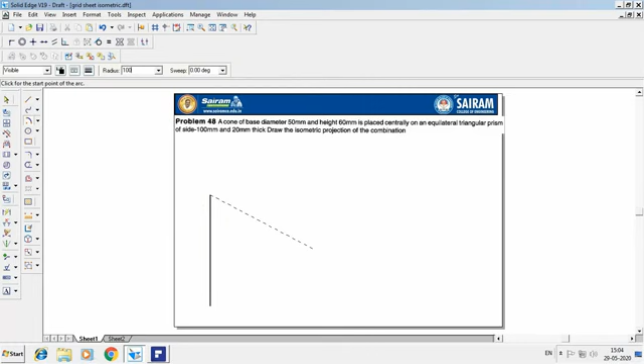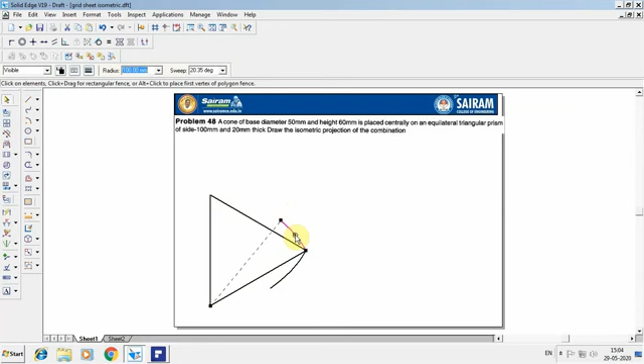Let us draw the equilateral triangle first, taking the base as 100 mm. Then I'll take the arc by center point at radius 100, draw the arc, and similarly take the radius again as 100 and cut. So I trim off this and get the end points so that I get an equilateral triangle of 100 mm each side. Once this is done, you have to convert it into a rectangle.

So I want to take the position over here, extend this and convert that into a rectangle and take the dimensions. One side will be 100 as the base, and this side you want to get as 86.6, which you keep as it is.

Now I'm going to label the points: this as 1, 2, 3, and this as 4. So I'm going to start with 1 now.

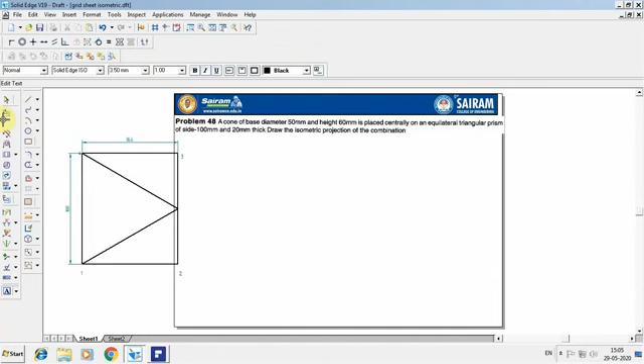So 1 to 2 will be 86.6 at an angle of 30. Then I have to take 100 at an angle of 150. Then again it will be 86.6 at an angle of minus 150. Then 100 at an angle of minus 30.

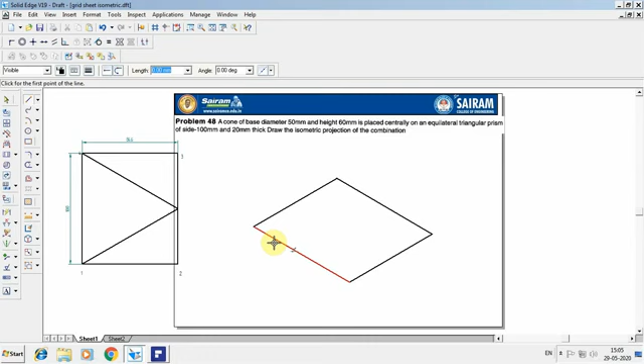Once you've done this, 1 to 4 will be the exact one, and here you have to join exactly to the center. So I will go for the center of that one, and this will be the isometric view of a triangle.

So this I want to take as 0.13 thickness. Identify the center point - you can identify it from here, or you can go for the iso sketch also.

So I can go for the trim, trim off that, and take the dimension of this. This will be the center point, 28.87. Or you can keep the line as it is - trim this one and keep this as it is.

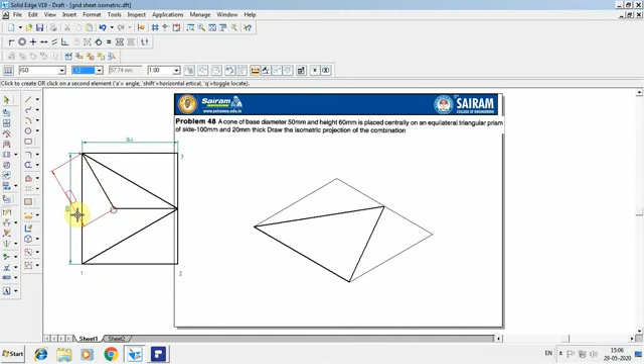So I want to take the distance from here to this as 28.87, and draw a line from the center to this one. On this line I'm going to take 28.87 and keep it on the line - that will be the center line.

Now the height of the triangular prism is given as 20, so I'm going to take the axis height as 20. These lines you can trim off, and keep this as 0.13 as a reference line - this is the axis, so convert that into an axis.

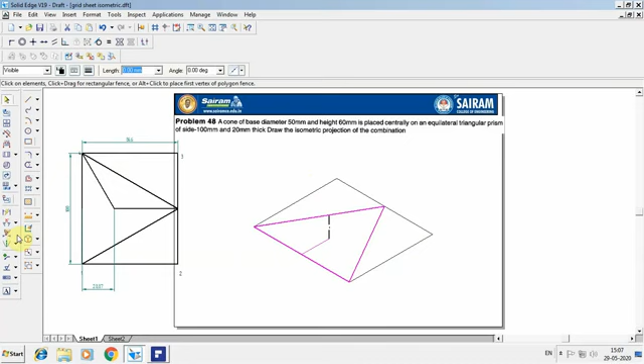Now I want to select everything, leaving the axis, and go for the move option with a copy. I'm going to select this point to be on this point, then join the lines of all three corners. So this is how the prism will look in isometric view.

So this is the center point. Now on this center point I have to construct a cone. Again, the cone can be constructed directly on this, or I can separately construct it and place it on that - so both methods are going to be shown now.

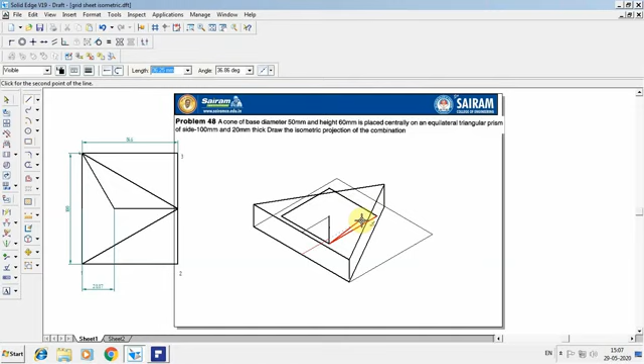So the cone is of 50 mm, so I want to come down as 25. I'm going to take 25 mm at an angle of minus 90, then 58 at an angle of 30, 58 at an angle of 150, 58 at an angle of minus 150, 58 at an angle of minus 30. Once you've got this, I have to construct the circle over there.

I'll make these lines as thin construction lines. Take the line from this point to the opposite center point, similarly from here to the opposite center point, so that you can easily identify the visible things.

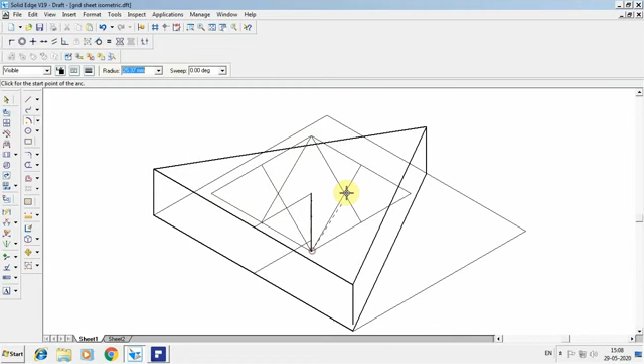Again from here to the center point of this, similarly from here to the center point of this. Go by arc by center point: select this as the center, this as the radius, and I want to join. This as the center, this as the radius, I want to join. At the intersection point, take the radius, and again at the intersection point take the center, and I want to draw the radius.

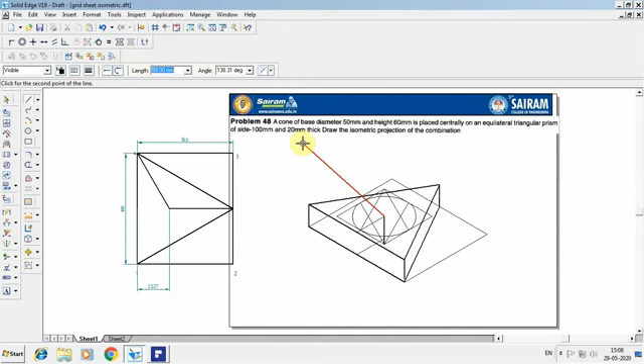So once you've done this, from the center, the height of the cone is given as 60. Select 60 mm height and keep that as the axis line. So now zoom that.

Which lines are visible, I want to take as thick lines, and the axis also I want to take as thick. So later I can trim off the lines.

I'll go from this to the tangent line, and similarly from here to the tangent line. Select these two and make that as 0.5 mm.

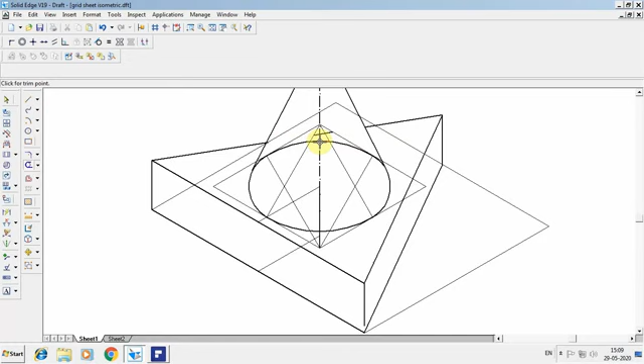Now if you want to trim off the invisible lines, go for the trim option and trim off whatever is inside. This and this also you can remove.

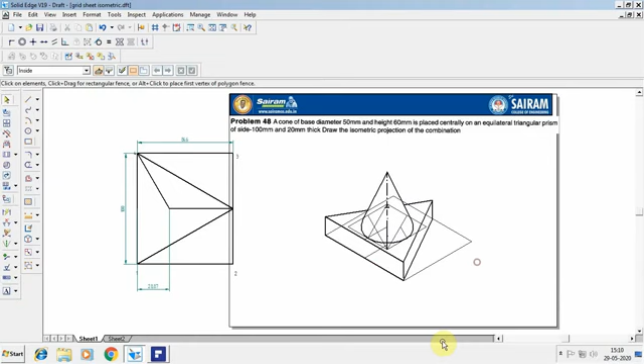So this is how it's going to look in the isometric view. To make that an isometric projection, select this, go for scale, and convert that into 0.8. So this is how you complete the problem on a triangle and a cone.

Let us consider another problem. A triangular pyramid, base side 40 mm and height 50 mm, is placed centrally on a square slab of side 80 mm and 20 mm thick. Draw the isometric projection of the combination.

So here also we have a triangular pyramid and a square slab. Let us take the square slab first. The square slab thickness is given as 20 and length is given as 80.

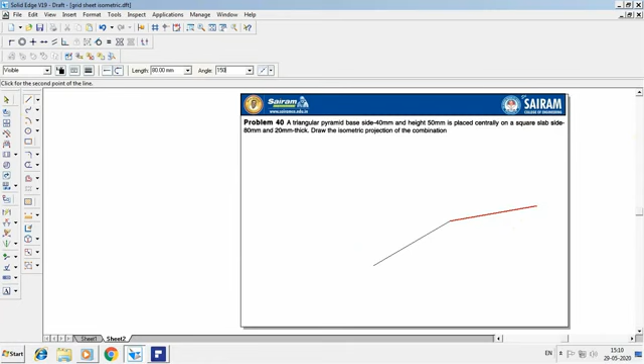So 80 at 30 degrees, 80 at 150 degrees, 80 at minus 150 degrees, 80 at minus 30 degrees. The height is given as 20, so I can take 20 mm thick.

Again you can go for 80 at an angle of 150, 80 at an angle of minus 150, 80 at an angle of minus 30, and 80 at an angle of plus 30.

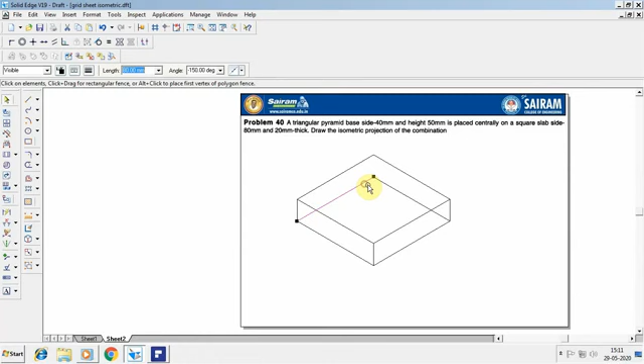Once you're done, join that. Go for this and trim off whatever is invisible. Later I can take the center line.

So this indicates the center line, this is the center point or axis point of the square slab. Now above it I have to place a triangular pyramid.

To construct a triangular pyramid, first normally I have to go for the normal sketch. The base side is given as 40, so better you can take 40 at an angle of minus 90.

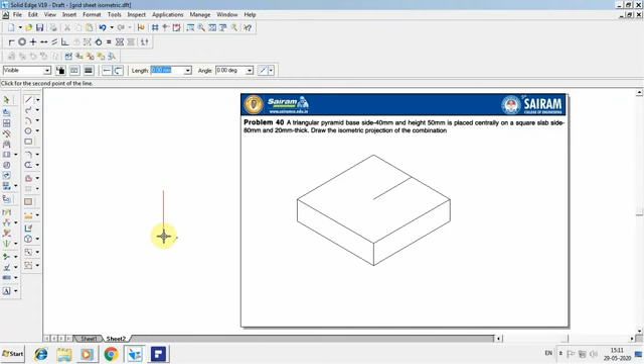Then go for arc by center point, 40 as the radius, draw. Similarly from here, radius as 40, draw the arc. Go for trim.

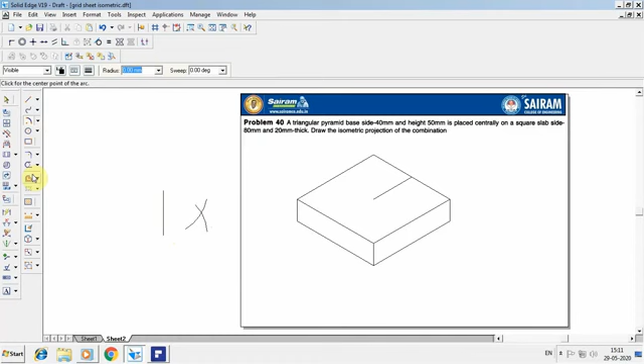So take the line, then go for converting into a rectangle, or directly take it here to the median. Go for the small dimension.

34. So I want to select this and keep aside. If I take the point, this center point I have to identify. So the center point will be over here.

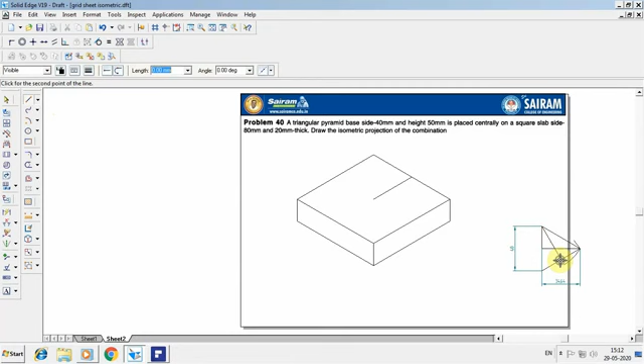So the center point will be 23.09. So overall it will be 34.64, and the center point will be 23.09.

Now what I want to do is, from the center, this is the center, I want to take 23.09.

23.09 at an angle of 30 on this side, and this side I want to take 34.64 minus 23.09, that I want to take as this side.

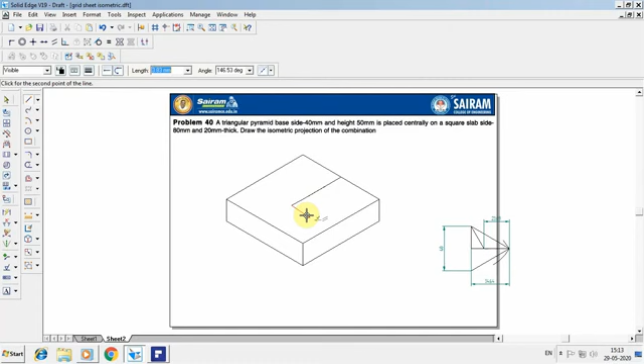Once it is done, select from this point to this end point and this end point. From the axis it is having 50, so increase the height by 50, then join to the respective positions.

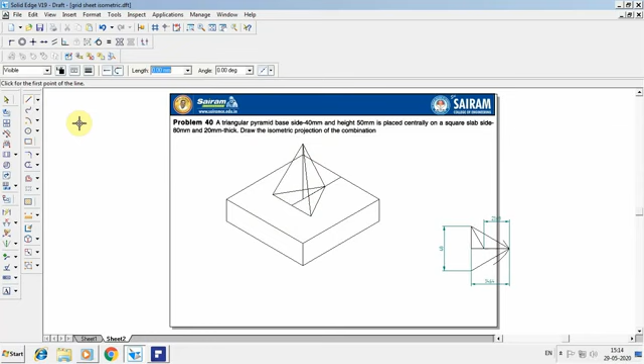Once you've done this, this is your axis line, so make that as axis. You can zoom that, so whichever lines are invisible you can directly remove. This will be invisible, this will be invisible, and this line will not be visible, and this line too.

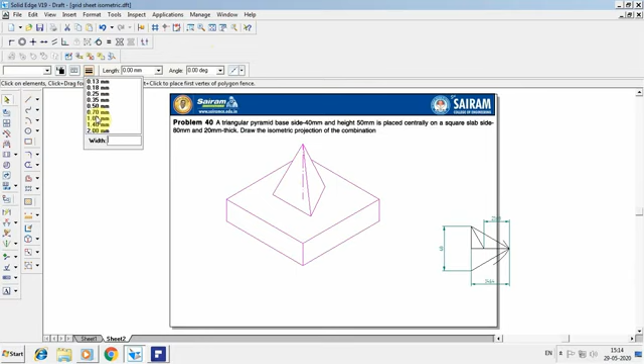Select everything and make it 0.5, and select that, go for scale and scale factor as 0.8. So this is how you're going to solve problems on a triangular prism or a triangular pyramid.